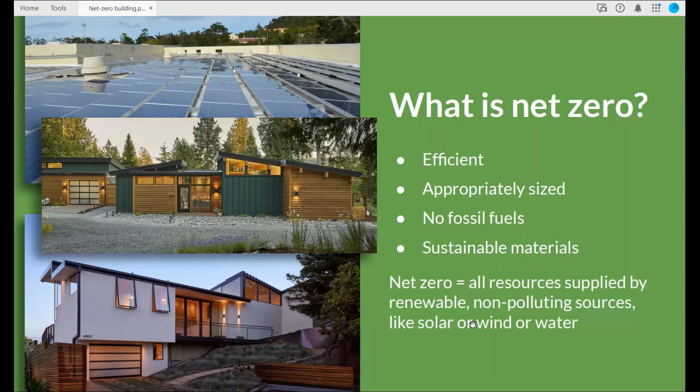Maybe we should also define what net zero isn't. Solar on the roof is a good start, but having a diesel backup generator or a gas stove or a fireplace, that means you're not net zero. Net zero means that all of the energy the house needs is supplied by renewable, non-polluting, non-carbon-based sources like solar or wind.

When I tell people that my home is net zero, they'll say, 'Oh, well, you're off the grid then.' Being off the grid doesn't equate to net zero. My home is not technically off the grid. I trade power with Puget Sound Energy. Although when the power goes off, yeah, I'm off the grid, but I have battery backup that keeps my net zero home comfortable.

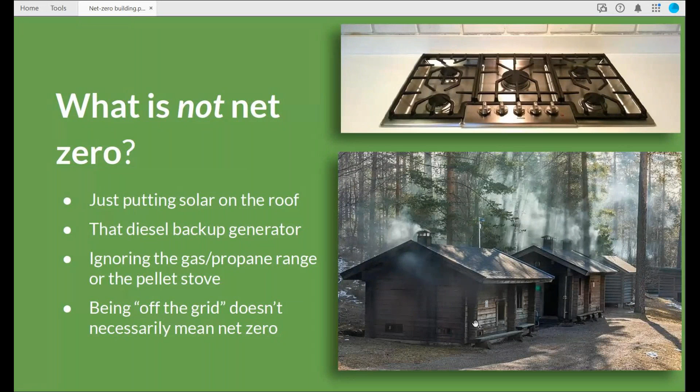Michael will tell you that I knew where every rug, every piece of art, every table, every chair was going. Particularly if you're building small or downsizing, you need to plan ahead. No, that enormous sectional probably won't fit in your living room. Can you live without a dining room? You need to think about these things while you're designing the house, not while you're building it.

It's important to examine what you want in a home because you're going to be living in it for a long time. It can be the most efficient home in the world, but it still has to suit you.

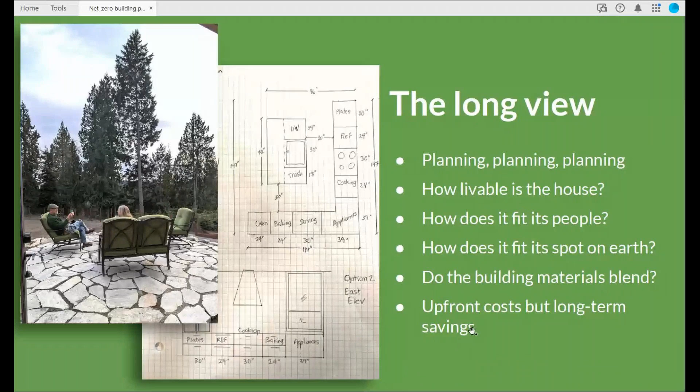I knew that I wanted to build a home that fit in the Pacific Northwest woods, which is a big reason why I chose Lindal. I think Lindal homes personify the beauty of the Pacific Northwest. They fit the landscape. As Frank Lloyd Wright said, no house should ever be on a hill or on anything. It should be of the hill, belonging to it. Hill and house should live together, each the happier for the other.

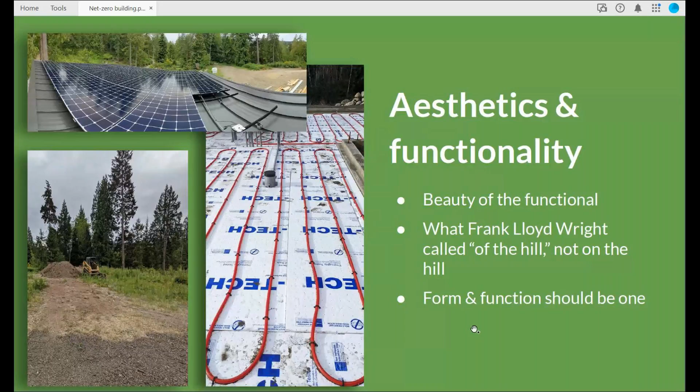As you consider where your net zero home will live, be practical about the location. Is there enough solar potential? I looked at about 60 properties in Kitsap County before I found the one I eventually bought. There were some that were tempting, but lacked enough southern exposure for solar.

Also consider what's the neighborhood power personality. I lived in an RV on my property for 18 months while I was building. I discovered right away that my neighborhood suffers frequent power outages, so I planned ahead and I installed battery backup power. You also need to think about how you'll live there.

For me, I just turned 70. I wanted a house where I could age in place. So I did two things.

I built a single level home with accessible entrances, and I built what's shown on the plans as the workshop, which is a little guest suite on the far side of the garage, a studio apartment that eventually may house someone who cares for me in my old age.

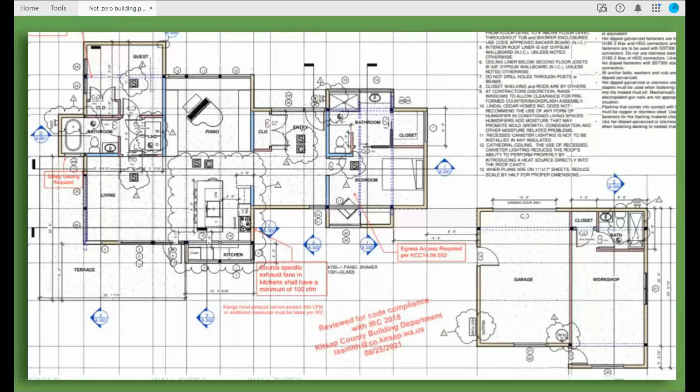One of the great things about working with Michael Harris was that he understood that although I needed a little more room in certain areas, I didn't want a big house. I just wanted a home that was appropriately sized. A bigger house takes more energy to heat and cool, and it takes longer to vacuum and clean.

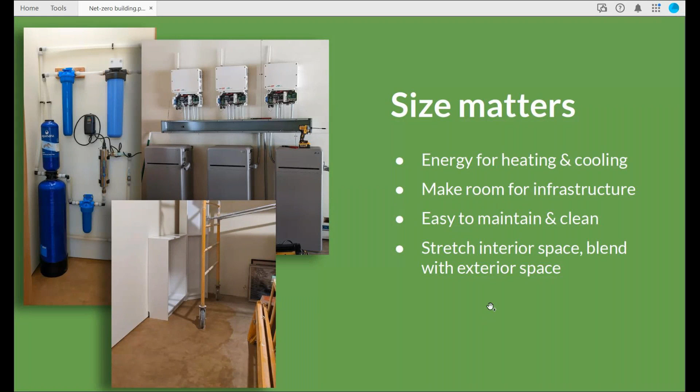Now, if you're downsizing into your new net zero home, you'll want to make your space feel as large as possible. You do that with light colors and simple trim. Lindal helps you out by giving you high ceilings and lots of windows and their beautiful designs.

Other strategies that I used in my home: very few upper cabs in the kitchen. This is the 9th kitchen that I've built, and I think I've got the perfect kitchen design now. For someone short like me, upper cabs don't make much sense, and the few that I use are lit cabs with glass fronts, which make them seem more like furniture and less like a cabinet.

And in the bathrooms, I used very large vanity mirrors that go all the way to the countertops behind the sinks. In my bathroom, I made the pocket door between the bath and closet into a mirror, which removes the need to take up wall or floor space for a full-length floor mirror.

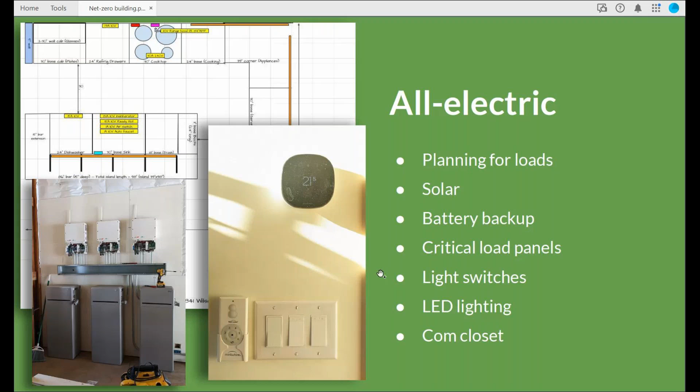Now, like everything else, you have to plan for how the house is powered. You're going to want to use the most efficient lighting and appliances that you can find. You'll also need to think about what does not get powered when you're on battery power. I have about 75 amps of backup battery power, but that won't power my entire house.

In my case, everything in the garage, all the infrastructure, is on what's called the critical loads panel. That means I'll have hot water, heat, and well water when the grid goes down. But I had to make some choices about what goes on the critical loads panel in the house.

On the main house panel is everything else, including washer and dryer, septic, oven, and dishwasher. These things are not automatically shifted to battery backup during a power outage. However, I can backfeed the main house panel through the critical loads panel if, for example, power is out for several days and I need to run the septic pump or do a load of laundry. I just have to be selective about what's turned on when I'm on battery backup.

Now, one of the challenges in building an all-electric home is getting through code review. The building department sees an all-electric home as a drain on the grid. And even when you're pointing at all those solar panels that are going on the roof, their approach is to encourage people to use high-efficiency gas or propane appliances instead of electric.

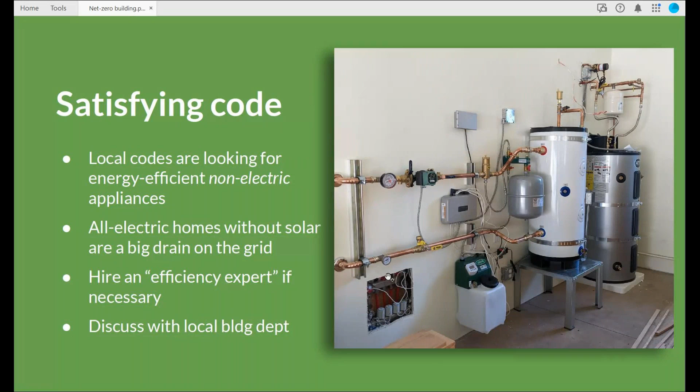There are some things that, no matter what you do, are not environmentally friendly, and one of those is concrete. If the cement industry was a country, it would be the third largest emitter of carbon dioxide in the world, after the United States and China.

What makes cement, which is the binding agent in concrete, so bad environmentally is its production process. First, you extract calcium carbonate from raw materials like limestone, and then you heat the powder at high temperatures in a rotating kiln. We pour about 250 million tons of concrete a year.

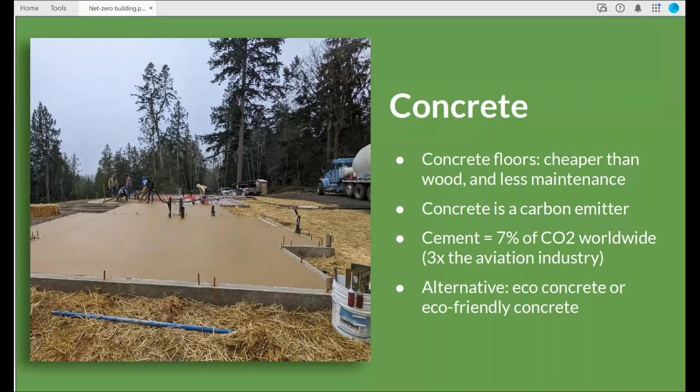Finding a way to make cement with a smaller carbon footprint is big business. There are beginning to be alternative concretes, and I tried to find a supplier when I was building, but there just aren't any in Kitsap County. My house uses Portland cement, and I love my concrete floors, although I do wish that they were made from one of the new eco concretes, which are getting easier to find and cheaper.

Some companies use aluminum silicates produced from fly ash, alkali activated cement, which produces 95% less carbon dioxide than ordinary Portland cement. There are also some cements that are produced from crushed industrial waste. Some of those products are cheaper and last longer than traditional concrete, but they may be hard to get. And that is a really good reason to recycle your construction waste because much of it is reclaimable and reusable.

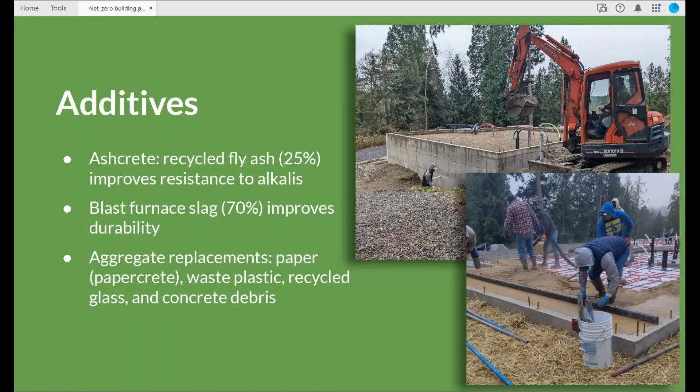Composite concrete uses additives that actually improve the concrete. It has a longer lifespan due to its increased resistance to corrosion, and better workability makes it easier to place and finish. Lower heat of hydration during the curing process reduces cracking, which protects from water damage.

At the very opposite end of the spectrum from basic concrete is the technology that makes a modern home into a smart home. If you're building a smart home, I've built two now, I have some advice for you.

Do not choose technology that is too new. We call it not the leading edge, but the bleeding edge. When I built my home in Oakland 10 years ago, I installed 83 Wi-Fi light switches. They were just coming onto the market, really expensive, from a little Austin startup called Plum. I had the largest installation of any of their clients, and I ended up being a beta test site for them. Unfortunately, about a year later, Plum got bought by a big German consortium, and they literally disappeared overnight.

No notice to their customers. The phones and email just quit working. This was about the time my light switches were beginning to fail. I ended up having to replace all 83. The second time, I did my due diligence and chose a large company that makes a lot of networking equipment. TP-Link is not very sexy, but I knew they were unlikely to get bought or go out of business, and that's important.

Now, appliances, you'll want to install a magnetic induction range. I have a Bosch, and I am a convert. I don't miss my gas range at all. Magnetic induction cooking is very efficient. It's not at all like cooking on an old electric range, and it doesn't pollute your home with nitrogen dioxide and methane. My Miele dishwasher and convection oven, the refrigerator drawers, TVs are all Wi-Fi connected.

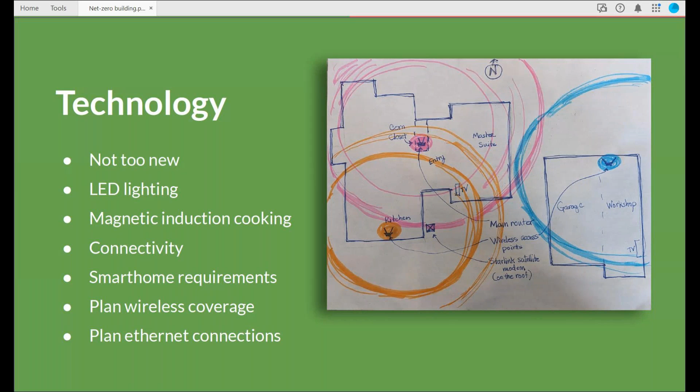I installed at least one wired Ethernet plug in each bedroom as well as in the kitchen. And am I ever glad that I did? Because originally I planned for only one wireless access point out in the workshop. When I figured out that I needed another one, fortunately there was an Ethernet plug in the kitchen, which was a good location. So even though you think you can rule the world with wireless, put Ethernet and cable into a few strategic places in your house to future-proof it. The cable in my house isn't even terminated, it's just in the walls, but it's there.

LED lighting is important in a net zero home for 3 reasons. It requires a tenth of the power of incandescent and therefore is extremely cheap to operate. And the bulbs last for decades, not months. People who don't like LED lighting usually complain that it's too dim or it's all different colors. That's because they don't know how to choose appropriate light fixtures.

First, you need to know about the K that indicates LED light color. The K stands for Kelvin. He was a British physicist and mathematician who developed the scale as a measure of temperature. We use it now to describe the warmness or coolness of LED light. To give you a reference point, daylight is about 5200 K. Any LED light below 2000 K is going to be a dim yellow glow like a candle. And anything above 6500 K is going to be bright blue-white.

So you choose a color appropriate for the space that you're lighting. Most residential space is lit with 2700 K or 3000 K, a warm white light. A lot of office space is lit with 3100 K, even into the low 4000s. Some light fixtures now have adjustable K. The key is to look at several different lights and choose what you like, and then, and this is the important part, stick with it. Buy everything with the same Kelvin temperature and your lights will match.

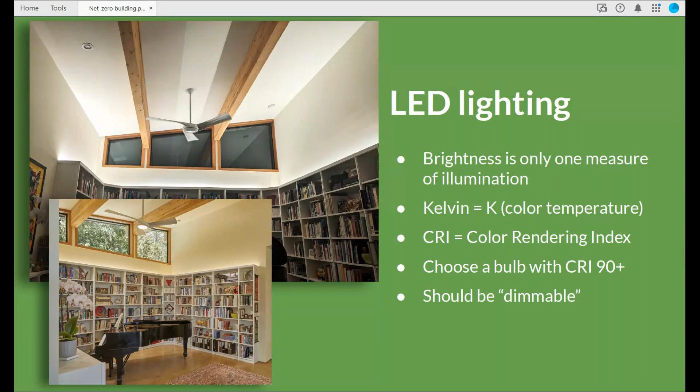You should also always choose a bulb or a fixture that is dimmable. It allows you to adjust brightness according to your mood or the time of day. For example, I have LED strips under the wall-hung bathroom vanities that are set to 25% to provide a little night light.

Ceiling fans. I have 4, one in each bedroom and one over the piano. They are all Wi-Fi connected, so I can control them with voice or through an app. You can reverse direction for winter or summer use. I mentioned fans because, particularly with a heating system like radiant heat, where there is no blower, fans help circulate warm air and mitigate hot and cold spots.

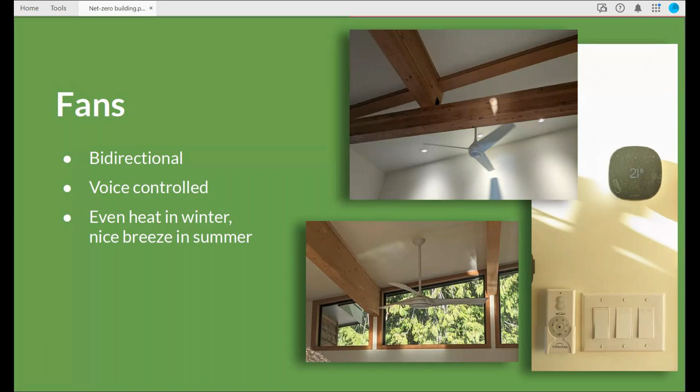Up above the fans is the roof. I elected to go with the standing seam metal roof because of its low maintenance and long life. Metal roofs are good for solar installations because there are clips for the standing seams that hold rails to mount the solar cells. A metal roof costs about twice as much as a shingle or composite roof, but it'll also outlast a non-metal roof for at least twice as long. And if you're catching rainwater for drinking, most metal roof surfaces are also NSF 61 approved.

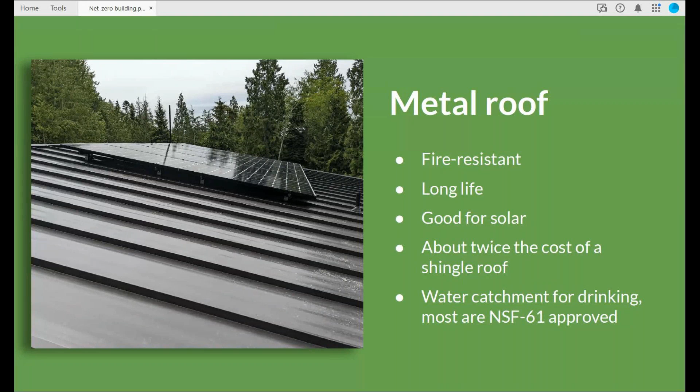Heat pumps. MIT Technology Review says that we have finally entered the era of the heat pump. They've been around for over 175 years. The heat pump was invented in 1856 by an Austrian guy trying to draw dry salt out of marsh water. The Brits expanded from water to air later in the 19th century, and the Americans learned to take heat from the ground in the 1950s.

Modern heat pumps are really efficient. A good heat pump supplies 3 to 5 units of heat for every unit of electricity used to power it. In comparison, a carbon-based heater can only produce as much heat as the energy contained in the fuel being burned. So a heat pump will always have a smaller carbon footprint than a gas boiler, even when it's plugged into an electric grid dependent on high-emitting suppliers.

Heat pumps have gotten some bad press, but at least some of it comes from, yeah, you guessed it, the oil industry. In spite of that, global sales of heat pumps grew by 11% in 2022, the second consecutive year for double-digit growth. Heat pumps have the potential to cut global emissions of carbon dioxide by 500 million tons in 2030. That's as much as pulling all the cars in Europe today off the road.

Some people think that heat pumps don't work well in colder climates. I think it's pretty convincing that 2/3 of the homes in Norway are heated by heat pumps. Back in the 1970s, during the oil crisis, the Norwegian government pushed people to adopt heat pumps, trained installers and maintenance people, and even after the oil crisis was over, they continued to offer incentives for heat pump use.

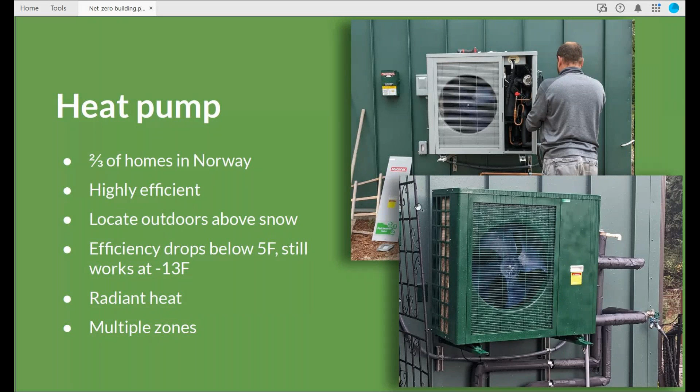Making your heat pump more efficient also requires good insulation. You should know what your local building department requires. Although my plans called for all blown-in insulation in the ceiling, I used a mixture of 5.5 inches of blown-in and 4 inches of roll insulation to make it a little more affordable. That still exceeds the Washington code for joist vaulted ceilings of R38.

There are some new insulation materials on the market, like Gutex fiberboard and GreenFiber, which is made from cellulose. Both Gutex and cotton have R values comparable to fiberglass. In the house in Oakland, I used blown-in insulation made from recycled denim. There's also aerogel tape, which you put between the wall joist and drywall to insulate from heat transfer through the wood, which is very effective, but still a little pricey.

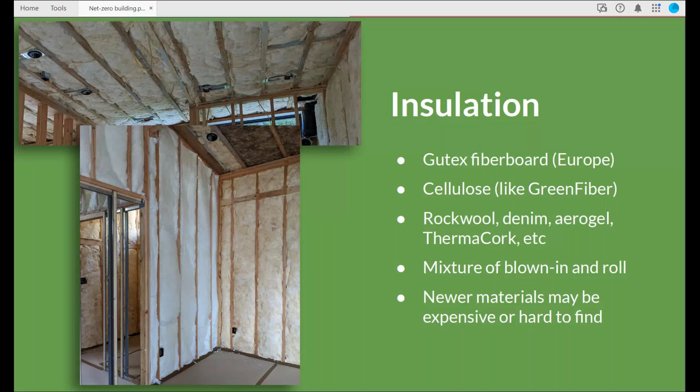For domestic hot water, I installed a 55-gallon electric mini boiler made by HTP Everlast. 55 gallons is the new limit on water heater size in Washington state. This heater heats water above the temp that you want and mixes it with cold water when it exits the heater to the temperature you call for. It's very efficient to heat and keep hot a smaller amount of water.

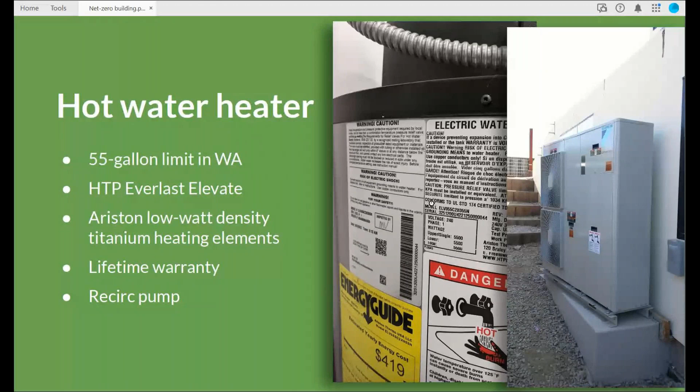As I finish up, I want to point out why Lindal is so great for building net zero. First of all, their materials are responsibly sourced. Your Lindal home will be built of high quality natural materials. The Doug fir I got for the inside trim was just beautiful wood. Even the glue lams that hold up my ceiling are pretty enough to leave exposed. There is no steel in my house, just good wood.

Lindal offers beautiful designs in a range of sizes with lots of windows and high ceilings that give a spacious feel to even the smallest homes like mine. They are customizable for a very reasonable architect's fee. I built the house I wanted, the house that was perfect for me.

Lindal also provides a lifetime guarantee on the integrity of its materials. They aren't in the business of building cheap spec houses with builder-grade materials. They're building homes that you can pass to the next generation with pride.

These infrastructure products are changing constantly. I understand from my solar installer that LG has gone out of the solar panel business, which is a shame because I think they made the best solar panels around, and I've had LG panels since 2008. But the landscape on eco infrastructure products is improving, and by the time you build your house, there will be choices that are even more efficient and cheaper.